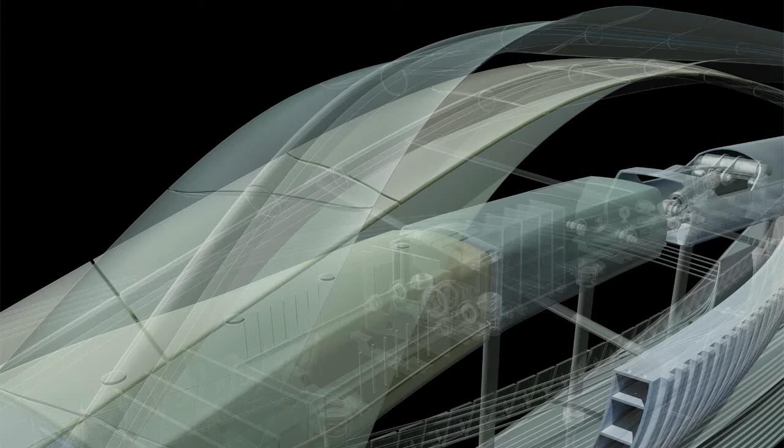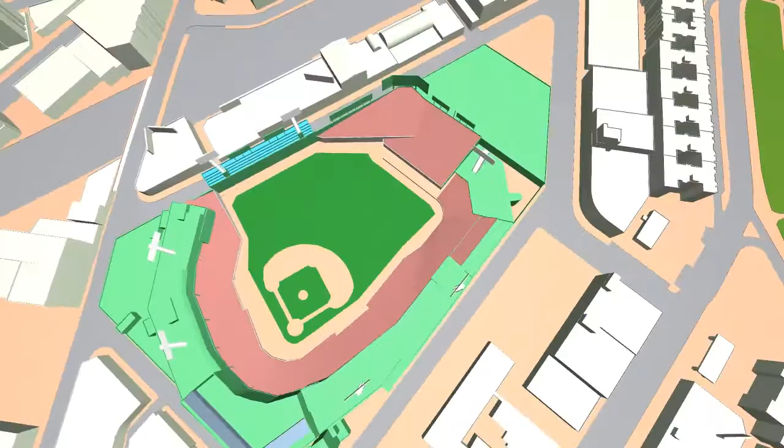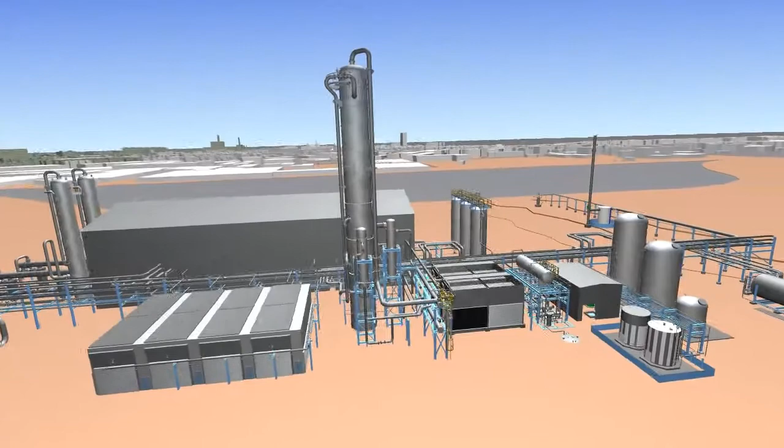Navisworks manages large datasets, whether large-scale city models or detailed facilities from numerous industries, including sporting stadiums and hospitality venues, power and process plant installations both on and offshore, and manufacturing for factory layout and simulation.

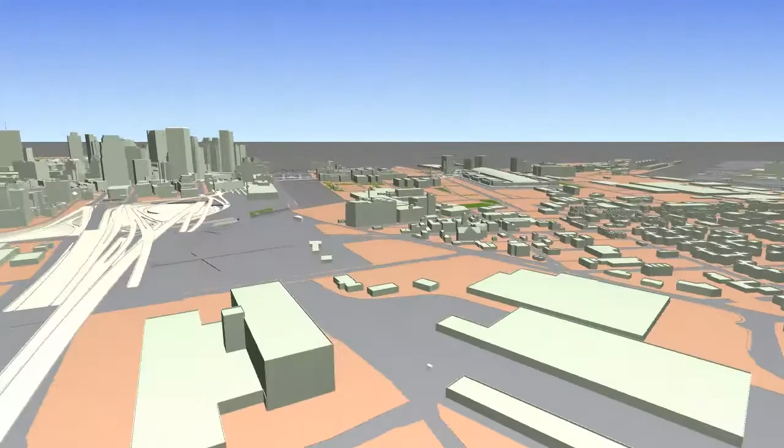Currently our largest user base is within the AEC industry, especially strong in construction. Here we see virtual design and construction specialists and construction managers using Navisworks to create a multidiscipline model, integrated from architectural, structural, mechanical and civil engineering models and specialist trades.

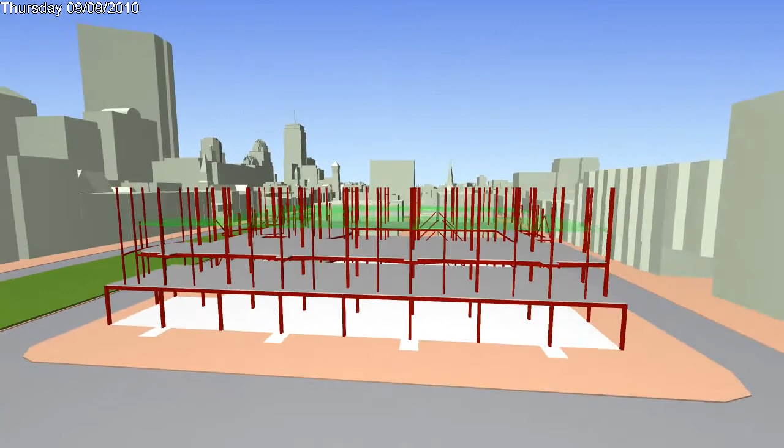This can then be further integrated with construction schedules for 4D simulation like this, enabling the project to be reviewed and analysed by all stakeholders in both space and time. Virtual design and construction is becoming to AEC what digital prototyping is to the manufacturing industry.

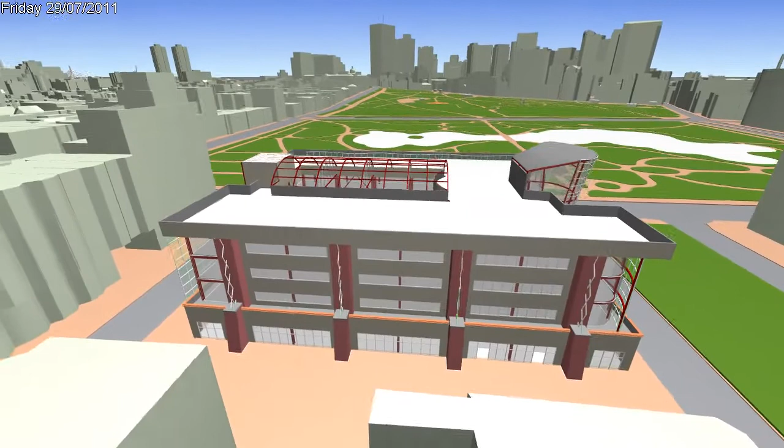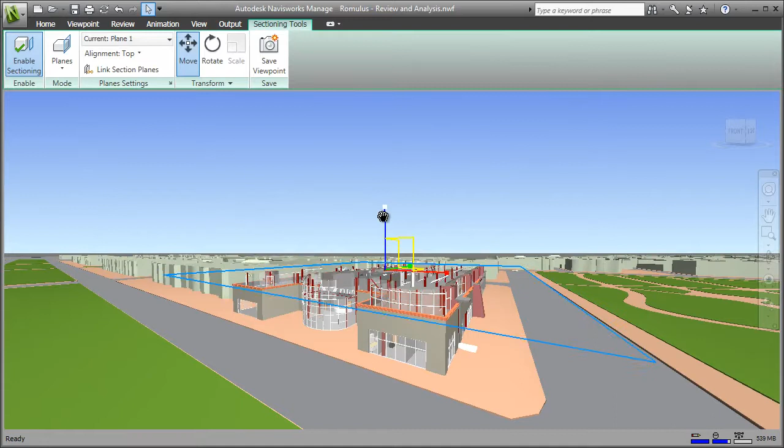And we're starting to see these highly detailed models used throughout the building's life cycle, linking to facilities management or operations and maintenance systems, with Navisworks providing a visual portal to this project intelligence. Navisworks provides a comprehensive review toolkit, including sectioning tools using direct manipulation to quickly isolate specific project areas for review.

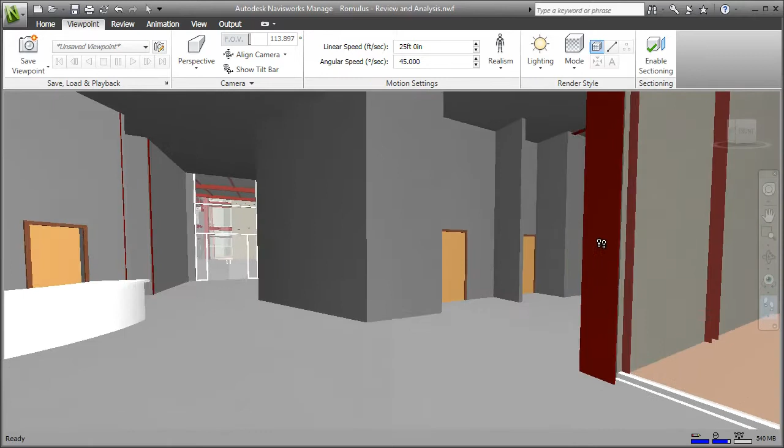Realistic navigation features such as gravity enables real-time exploration and interaction with the project model, providing all stakeholders, including owners, the opportunity to experience a project before it's real. Accurate measurements can be taken directly from the model, during review or in the field. Markup tools enable collaborative review and communication across distributed project teams.

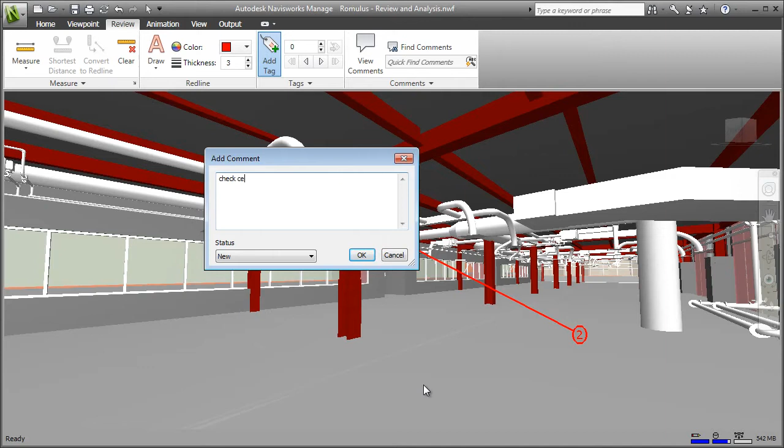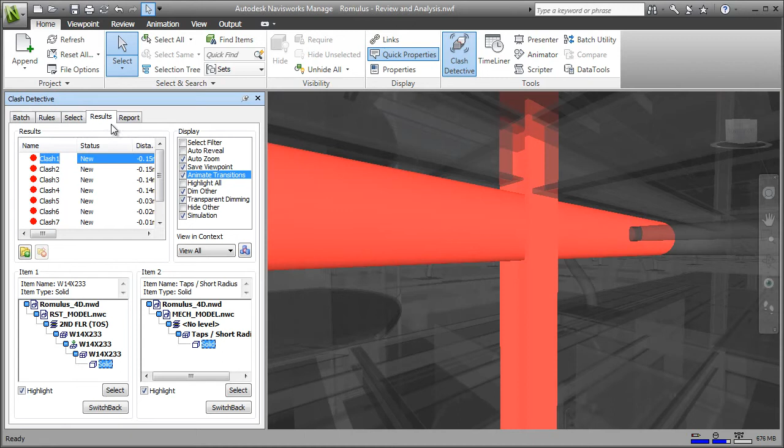Navisworks further delivers powerful analysis tools, including clash and interference analysis, management and reporting tools that enable users to find and address coordination issues virtually before getting to site, which can generate an enormous return on investment.

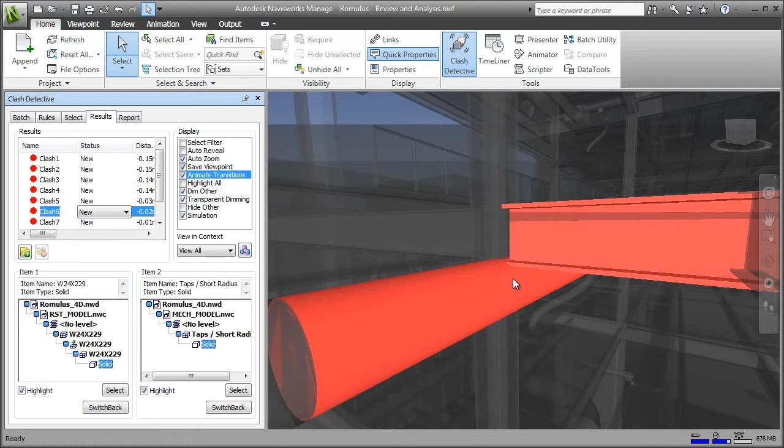As well as finding conflicts, you can manage these too. For example, grouping clashes that involve the same element enable you to deal with them together as a single issue. And using comments, statuses and reports to communicate and track these issues through to resolution.

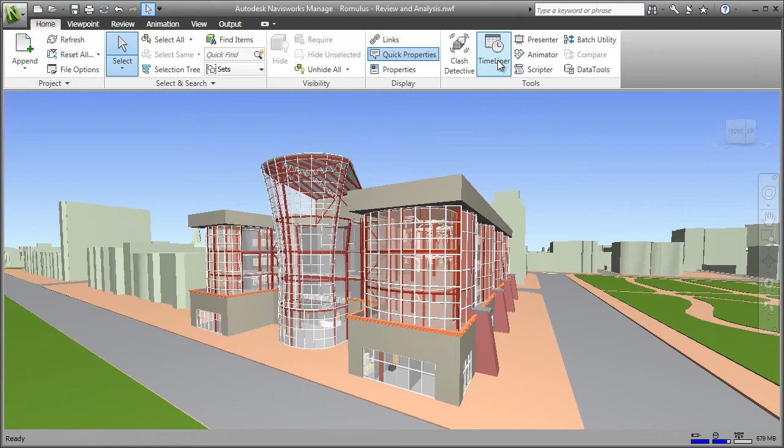As mentioned earlier, integrating design and construction models with construction schedules from third-party planning applications enables project stakeholders to visualize and validate their plans, and also simulate alternatives to prepare for what-if scenarios and identify optimum schedules.

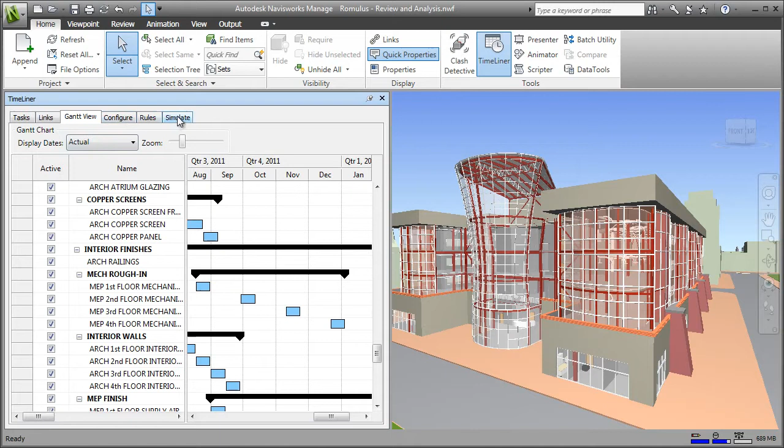So here you can see the schedule in a Gantt chart within Navisworks, with each task linked to the design elements within the project model. In the simulation, you can see the date up in the top left, and you have a project timeline that you can play back, scroll through, or jump to specific dates.

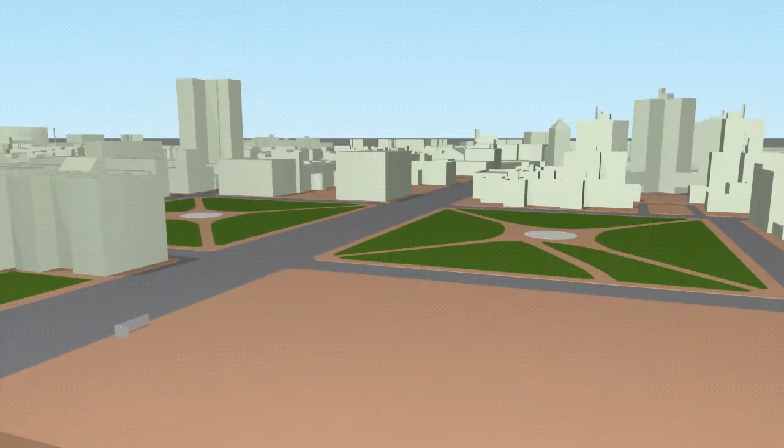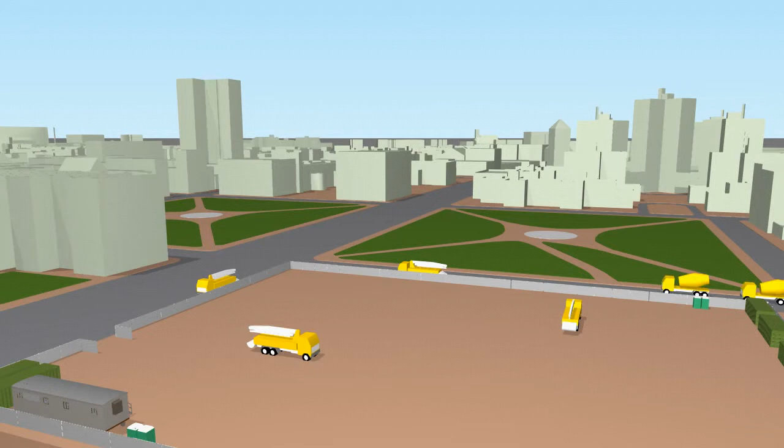This type of analysis can be further augmented to include logistics simulations, creating mock-up scenarios of construction sites to assist in planning and visualizing areas of potential risk. For example, finding optimum positions for site cranes, and ensuring adequate clearance with surrounding buildings, topography or temporary structures, such as scaffolding.

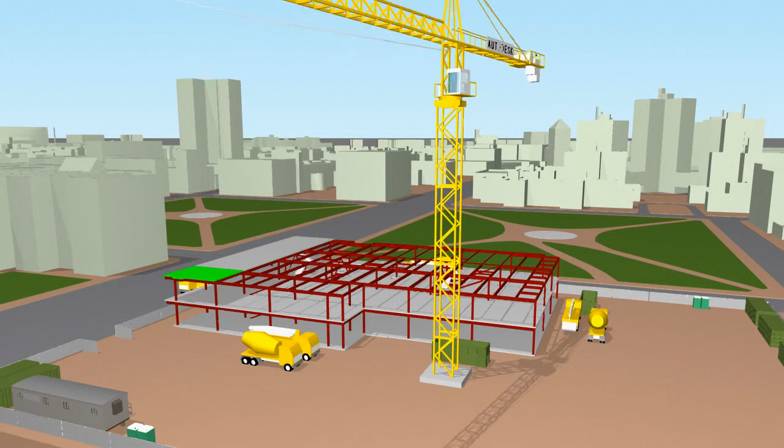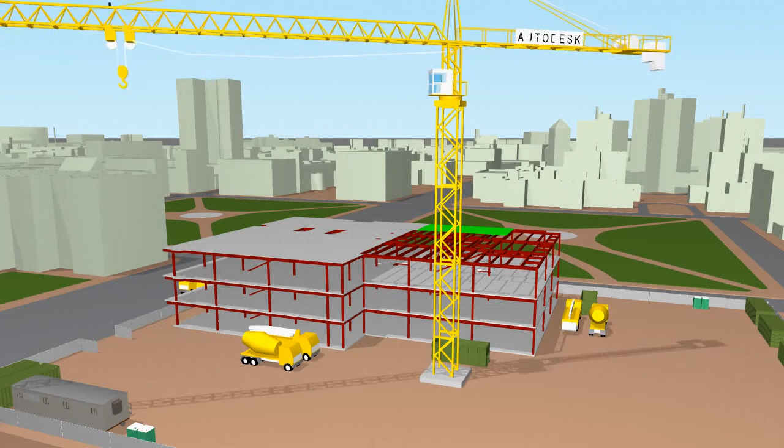Using the schedule to identify when materials will be delivered to site and where they can be staged, for example, whilst maintaining relevant access routes. The simulations can also be used to communicate temporary road closures, diversions and so on, in order to gain local government approvals or public acceptance. Or to ensure adequate access to install specialist equipment, or to explore removal of equipment for maintenance purposes.

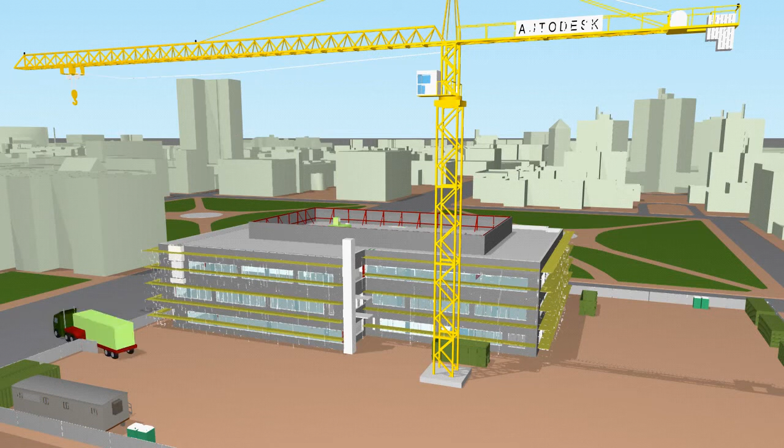So as you've seen, Autodesk Navisworks software facilitates improved collaboration between project teams by integrating diverse design and construction data to create a coordinated whole project model, which can be reviewed, analysed and communicated to all project stakeholders. This shared knowledge and understanding greatly reduces risk and increases the likelihood of the project being delivered on time and within budget.